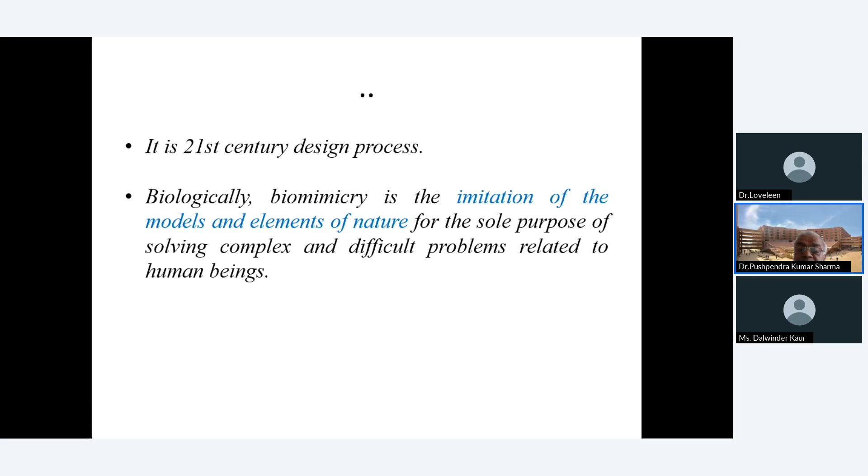Biologically, biomimicry is the imitation of the models and elements of nature for the sole purpose of solving complex and difficult problems related to human beings. So nature makes us learn many things. What is biomimicry? It involves the study of natural designs, processes, and systems.

So we see biological things surrounding us, and we examine their activities and characteristics, and accordingly we copy them in our technology. This is how we design, process things, and come across the system to create a product. So all the innovations inspired by nature are known as biomimicry.

Nature presents an endless source of inspiration for scientists and engineers from different fields of interest. I can tell you that every science and every engineering has been created from nature.

You know Newton's law - Newton experienced a falling apple over his head. This was a biological object, an apple, that fell on his head, and he created history, created a science we are learning, and that is being applied in each and every field of science. So this generation of science was a kind of example of biomimicry.

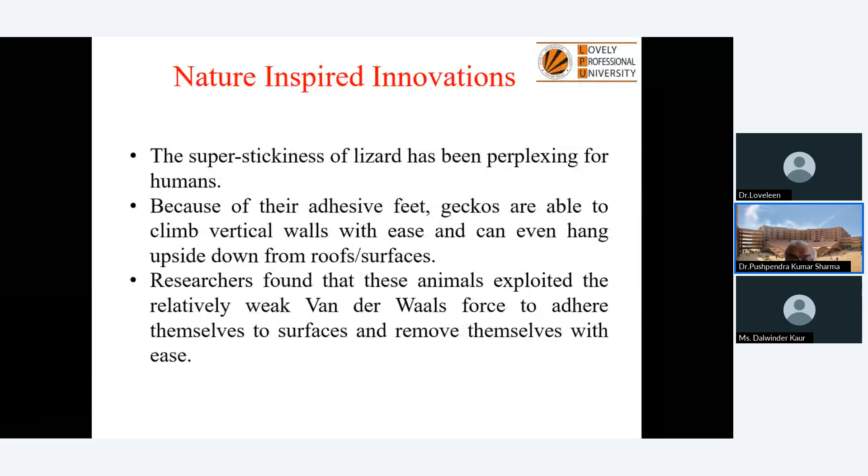This van der Waals force of attraction is a kind of attraction between two masses. There is one mass of the ceiling and another mass of the lizard. The lizard gets attached to the other mass due to van der Waals force of attraction. Scientists learned how this acts and created many things as nature-inspired innovation. This lizard has a special type of foot, and this foot releases liquid that can stick to the wall.

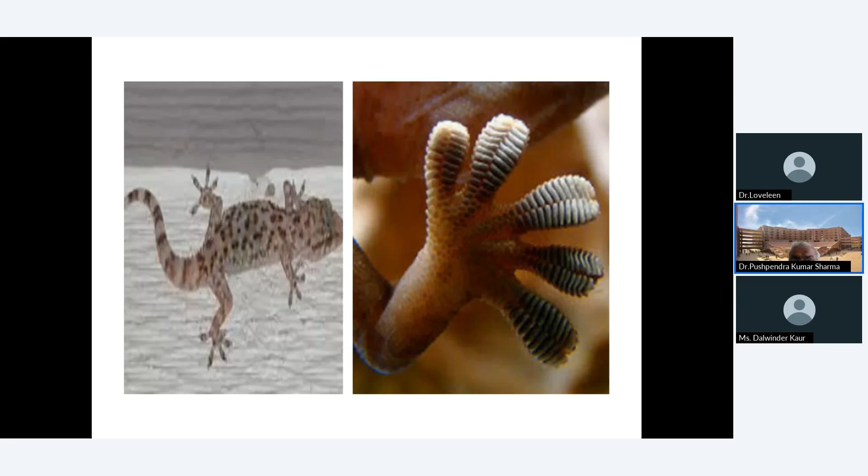When they want to leave the wall or move further, they can control this sticky liquid and move on. So at any time they can leave the surface, move on the surface, and stick to the surface for many hours, controlling all this sticky liquid coming out of their foot fingers. This was the technology, and scientists learned from it and created many inventions. This innovative idea inspired from nature gave them very useful products for social life.

Energy is one of the biggest challenges since long. Engineers for over 100 years have been on the lookout for improving the performance of the lifting device blades used in aircraft, wind turbines, compressors, axial pumps, fans, etc. To overcome the problem, they came up with tubercles or bumps which aid the flippers in generating continuous lift and maintain stability at all times.

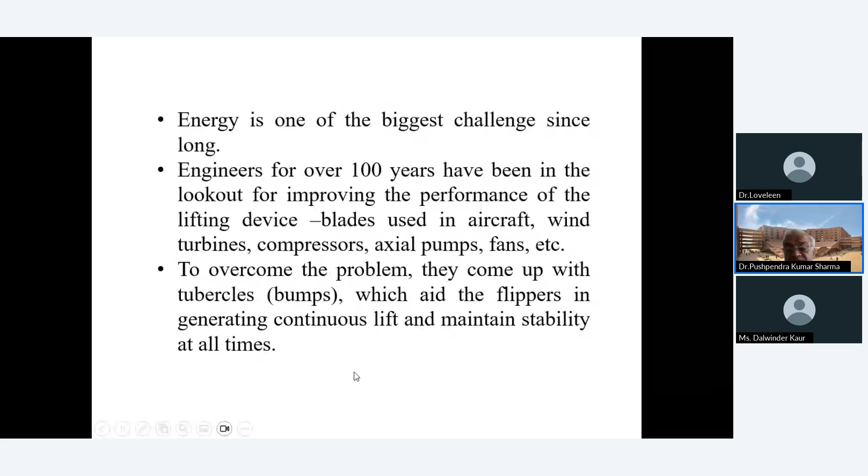This created how we are generating electricity from wind, from water, and from other sources like geothermal sources. The basic concept was motion, rotating motion. Something, when it rotates, exerts pressure on air, and this air pressing on anything can create energy, usable energy. So that energy can be used.

The same thing occurs in turbines when water falls on them. This turbine rotates, the axis of which is attached to the generator or dynamo, and that generates electricity. The same thing occurs in thermal powerhouses, where we burn coal, heat the water, and create steam. This steam flows at high pressure and falls on the turbine, making the turbine rotate. As a result, electricity is generated through the electric generator attached to this turbine.

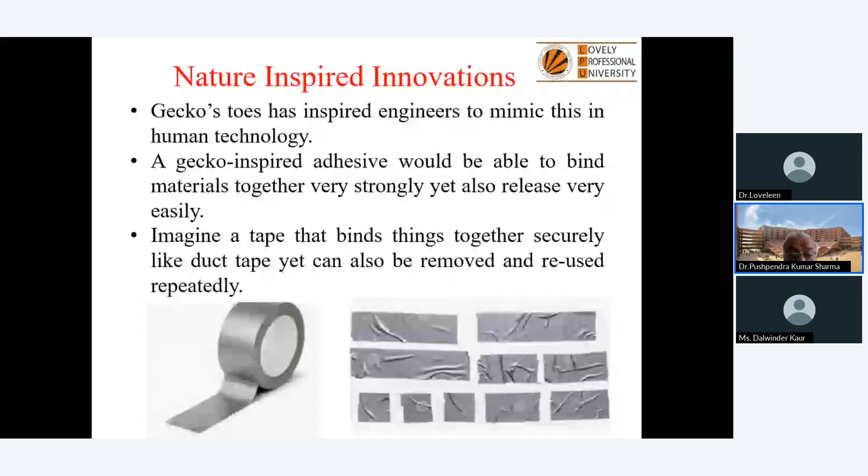So this wonderful force of attraction with sticky glue is being used. This gecko-inspired adhesive has been created by scientists. Imagine a tape that binds things together securely, like duct tape, yet can also be removed and reused repeatedly.

Next we come to another example: how does a leaf contain or repel water? Many times a leaf can store water on its surface, and many times a leaf can repel water from it. The taro heart-shaped leaves have an interesting quality - they are hydrophobic, meaning they will not at all allow water to stick to the surface.

So liquids that land on such surfaces do not wet the leaves, but instead roll off them - they are repelled, or rolled off from the surface of the leaf. Researchers from IIT Bombay have found pentagon and hexagon patterns on the surface of taro leaves. The walls of these patterns had a flake texture which helped in providing the water-repelling effect.

Suppose the same type of technology is used on the surfaces of a building, and these are painted by such materials - water will be repelled from it, so that the water will not wet your walls, and your house will be safe against dampness due to rain water.

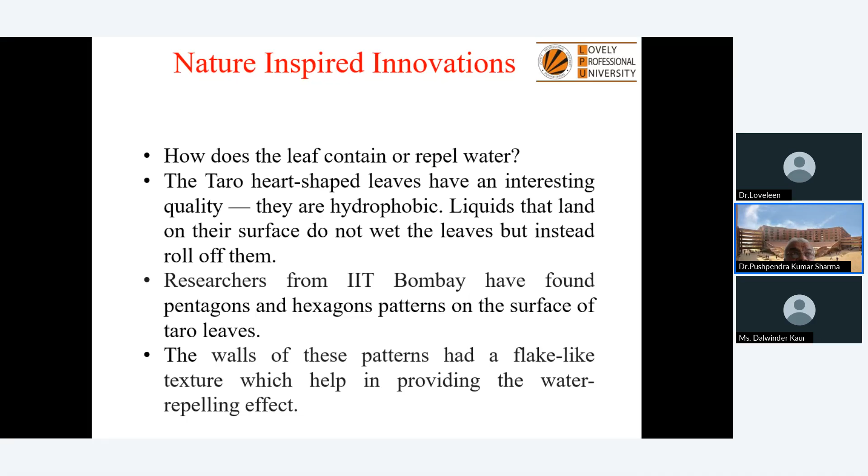This is what you might have seen - the lotus leaf. The water does not stick on it. The lotus is all the time in water, but its leaf surface is without any water - it is always free of water. No water can stick on it. Despite being submerged in a water body, it is never wet.

Similarly, there are some other plants on which if you spray water, water drops will come out and fall down from the leaf, and this will not wet the surface at all. This is also of biological origin, where we got this idea and created these kinds of paints which could repel water. This is the microstructure of those paints which have been used for painting walls without wetting them through rainwater or any other kind of water.

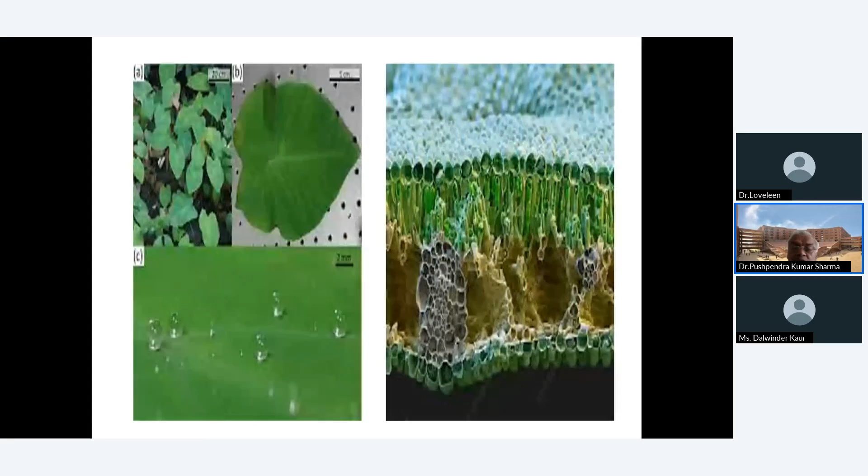Next, we come to another nature-inspired innovation. If you look at the microstructure of a leaf, you will find the world's best water distribution system in the leaf, because water is going through these veins, and then this distributes into small colonies. From this, civil engineers learned this idea, which inspired them to distribute water in a city.

So there are various types of networks through which water is supplied in a city, and from that, to different states, different mohallas, and within these different areas there are different houses to which water is supplied. Today there are many types of water distribution works here, like in a tree also.

Murray's law - this is actually a biological law - states that the roots of a tree suck water, and water is raised through the stem and branches of a tree, and then different branches distribute water to the leaves, and leaves perspire it - leaves evaporate this water, which is called evapotranspiration. So this Murray's law can also be applied.

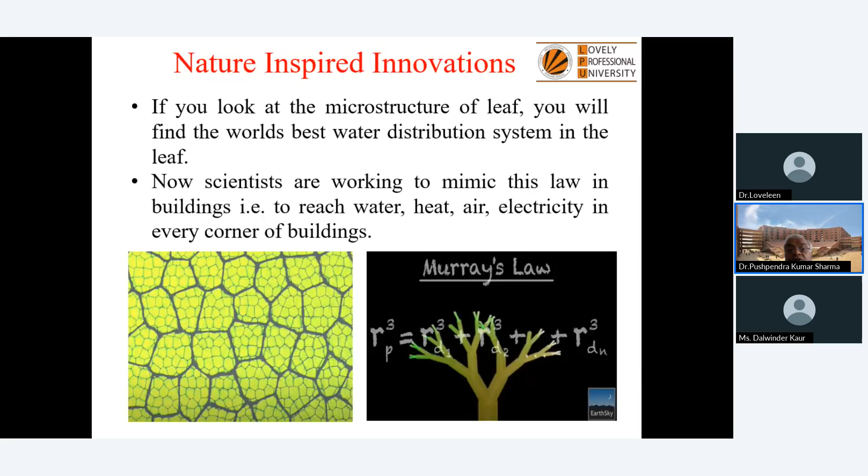Everything matter is defined as anything that occupies some space and has some mass is called matter. So everything is matter, and its characteristics depend upon the bunching of these atoms.

So biomimicry is not just reproducing a natural object or system, nor is it simply designing something considered green or sustainable. It is first a close examination of an organism: what it does, how it does it, and what is the mechanism behind it. Then it's a mindful application of the underlying design principles found in nature's solutions, which can be artificially created through any kind of engineering.

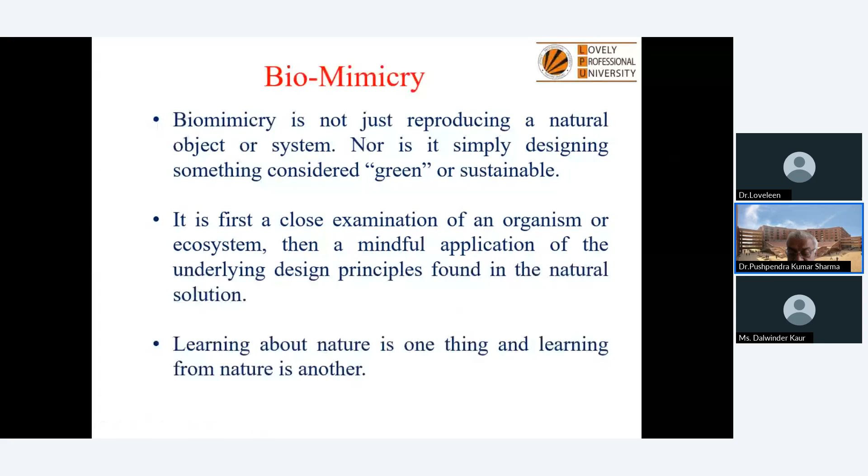So what are the benefits of biomimicry? You can think it helps create products and processes. So if we create some product, it's a single product, but if it is fruitful for society, if it is durable and sustainable, it is also cheaper when produced in mass amounts, in large amounts, then it becomes sustainable.

So we can create a product, but the first product when we create costs much. But if we create 100 products at a time, the cost goes down. If we create 1,000 products, the cost goes further down. So the more production of the products, the more will be the decrease in cost. Cost will be reduced, so this will be a cost-effective product.

Then what do you do for that? You cannot create thousands of products in your house as you created the first one. So you will need an industry. If you install one industry to manufacture this product, you alone will not do it - you will need some manual labor.

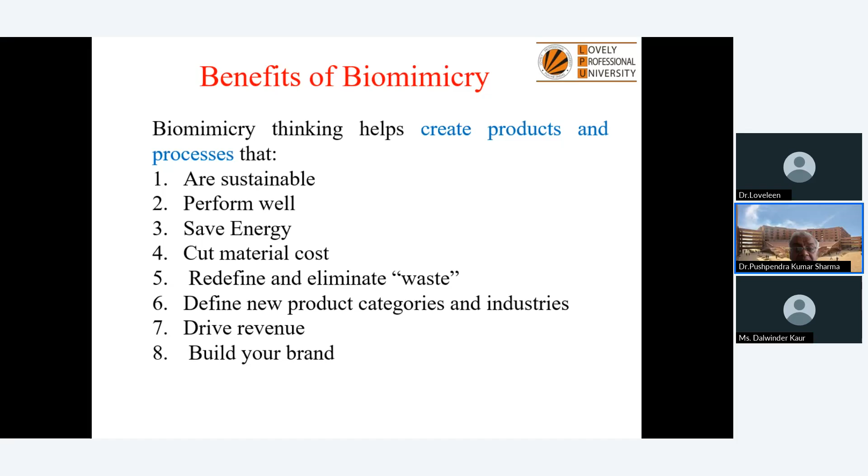So drive revenue and build your brand. When your product is well marketed, the sale is very high and your brand value becomes stabilized. So on the name of the brand, your product is sold. These are various benefits which we have derived from biomimicry.

There are some bio-inspired innovations, like the ant. One ant of 0.001 milligram weight can lift 10 milligram weight. Here, one ant is of very small mass but it is lifting a leaf, and the leaf weight is very high, but it can lift it. So this idea created that a small machine can lift more than its own weight - what JCB does.

So JCB was designed - its legs, its arms have been designed this way to lift heavier weight. So a JCB machine of suppose 2 tons can lift a 10 or 20 ton weight, and can excavate 10 or 20 tons at a time. This is the idea inspired from biological things - a small ant lifting and moving with a heavy load. So past several decades have seen a renewed focus on nature as a source of design ideas.

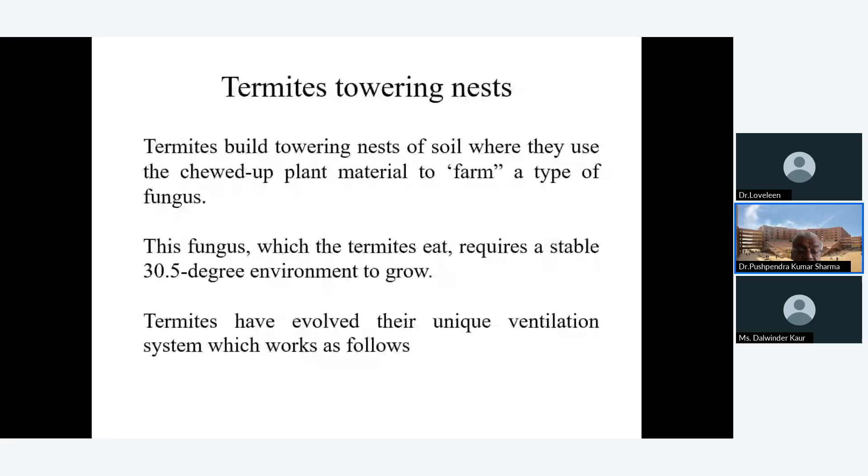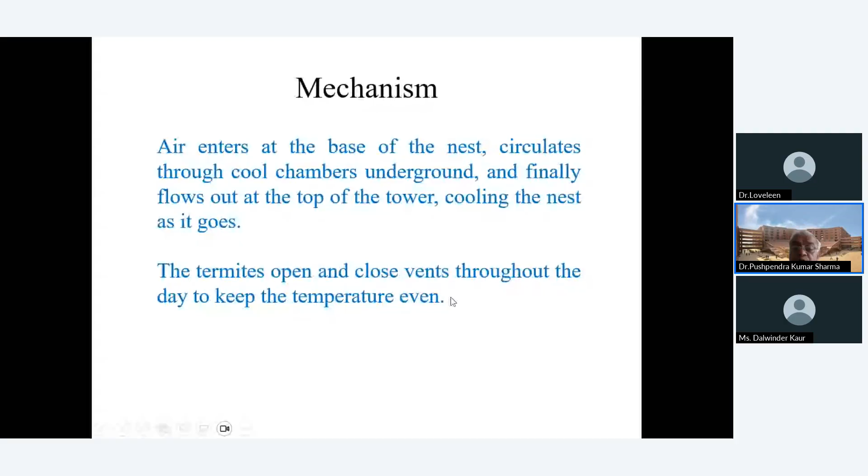So if we adopt the same thing in nature, termites have evolved their unique ventilation system. What is the mechanism? Air enters at the base of the nest, circulates through the cool chambers underground, and finally flows out the top of the tower, cooling the nest as it goes. The termites open and close vents throughout the day to keep the temperature even. This is what termites do.

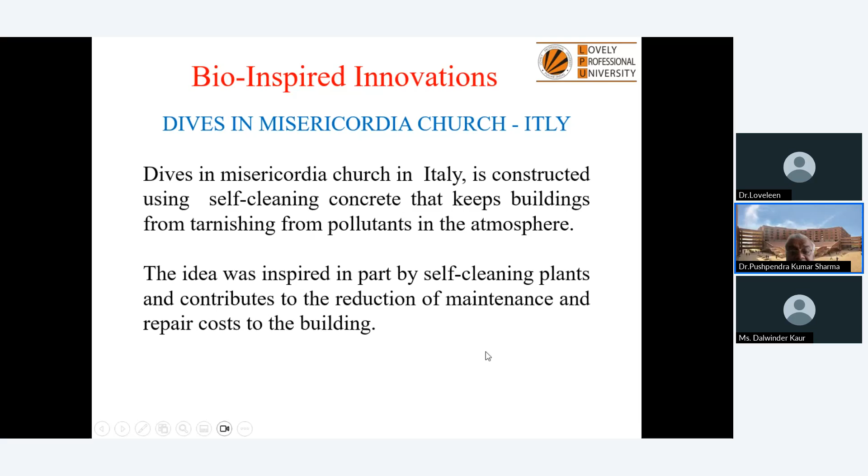It is a very high building and cannot be cleaned every time; dust may stick to it. So it is constructed in such a way that no dust will stick on it and make it dirty. This self-cleaning concrete is one of the ideas inspired by self-cleaning plants, and it contributes to a reduction of maintenance and repair costs of the building.

So this is the church in Italy, designed and constructed in such a way that no dust particle will stick on it, so it will never go dirty, and whenever there is rain, everything will be washed off if anything sticks.

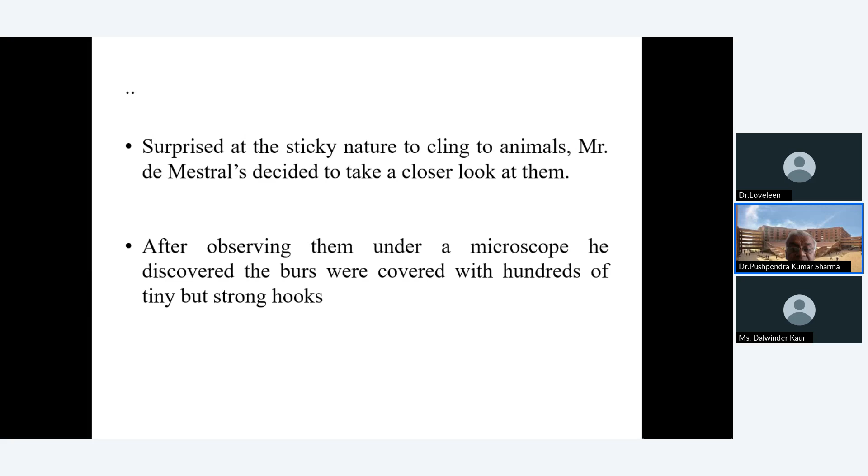Next, the hook and loop fastener was conceived in 1941 by a Swiss engineer, who went through nature and understood how to create a system that can be attached to anything. This he studied in nature, a special type of plant in which the fruits are very nailed, barbed fruits.

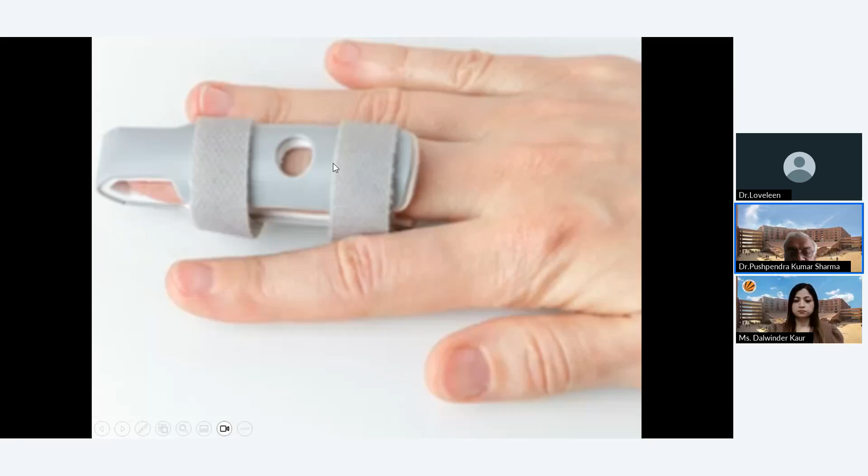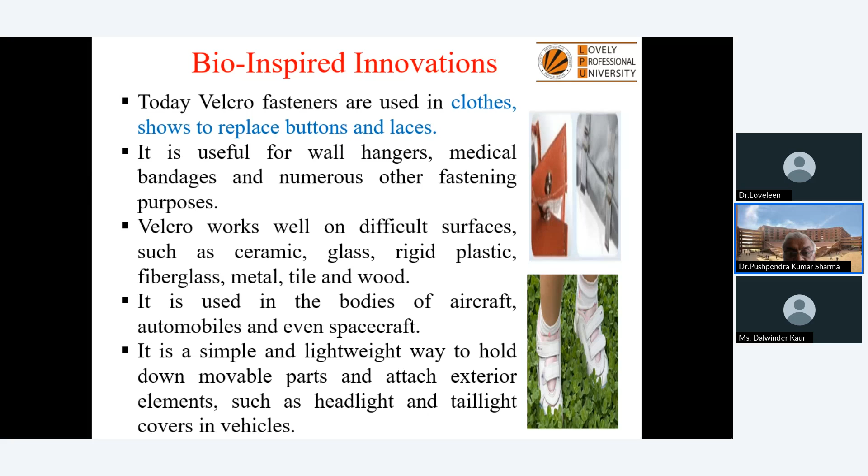So they studied it and created this type of loop and hook that can catch anything. From there we got the idea of Velcro. Velcro is used in your shoes, in your medical devices. So Velcro was also created from nature, bio-inspired fasteners going in nature. These are all bio-inspired, like Spiderman going on the wall, also inspired by gecko toes.

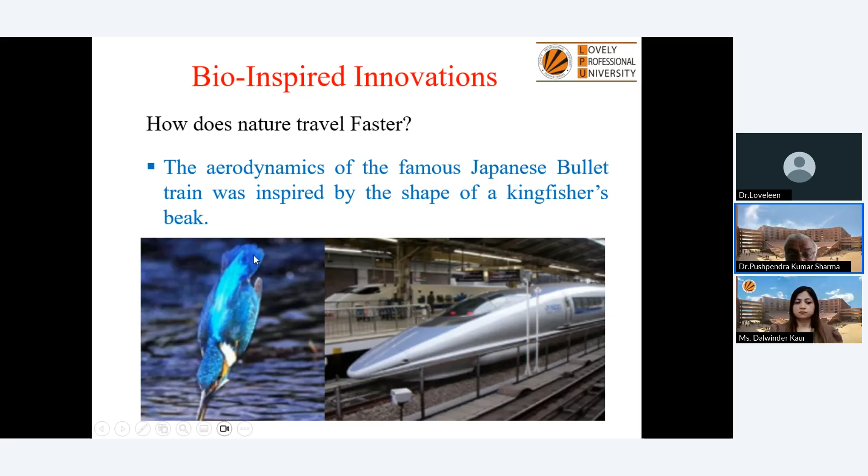Okay, so there are many such ideas. Fast rails are being designed on the basis of a bird which can fly very fast, and the same concept is being used in the shape of train engines nowadays.

Okay, so these are many ideas. Nowadays buildings have very less space, with columns and colonies, different colonies. So in future we will be having colonies in the sky, because space is less on earth. So these kinds of bio-inspired innovations are going on. Thank you very much for today's lecture.